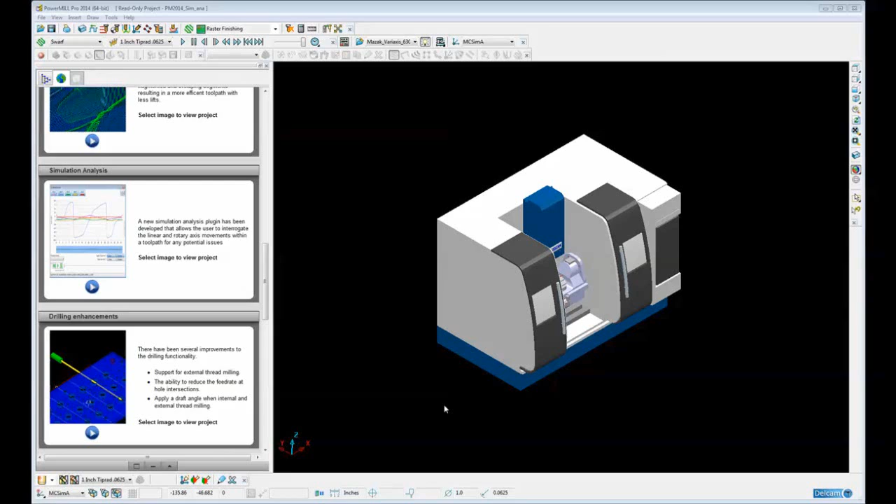A new plugin has been developed that allows us to analyze the machine tool simulation so that we can interrogate the linear and rotary axis movements within a toolpath for any potential issues such as axis reversals, for example.

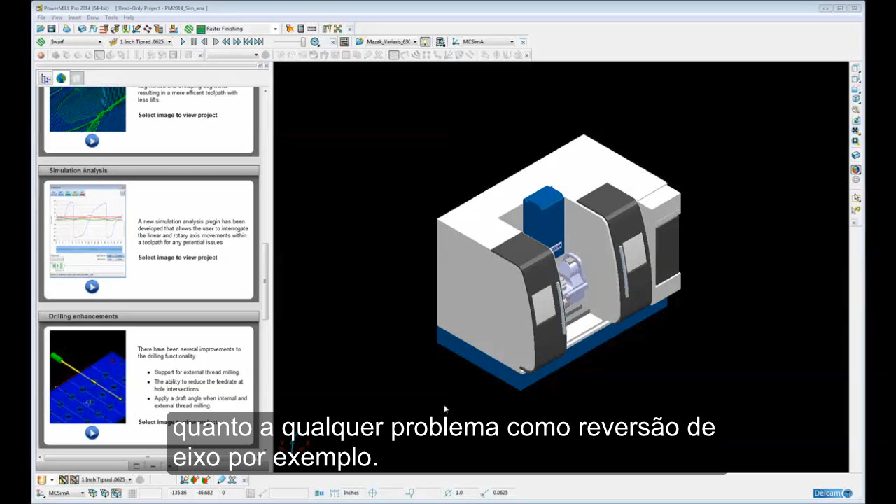If we view our plugin window, here we can see the simulation analysis plugin at the top, and we'll just go through an example of how to use the plugin.

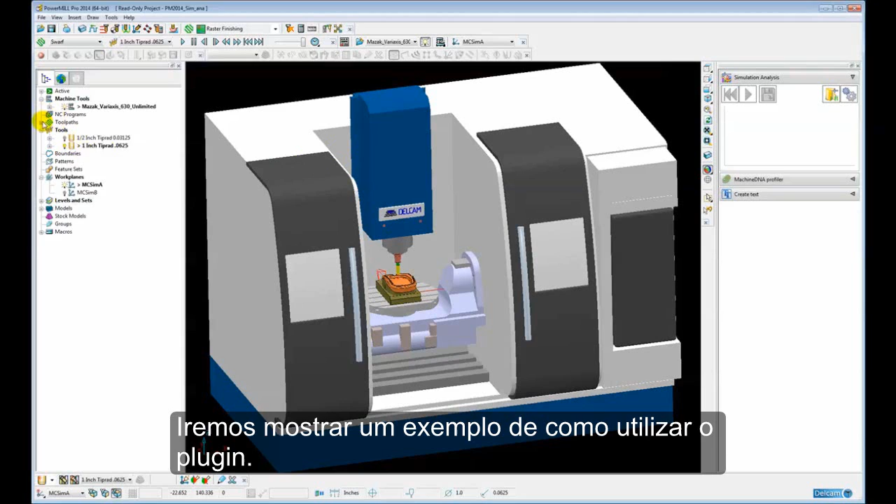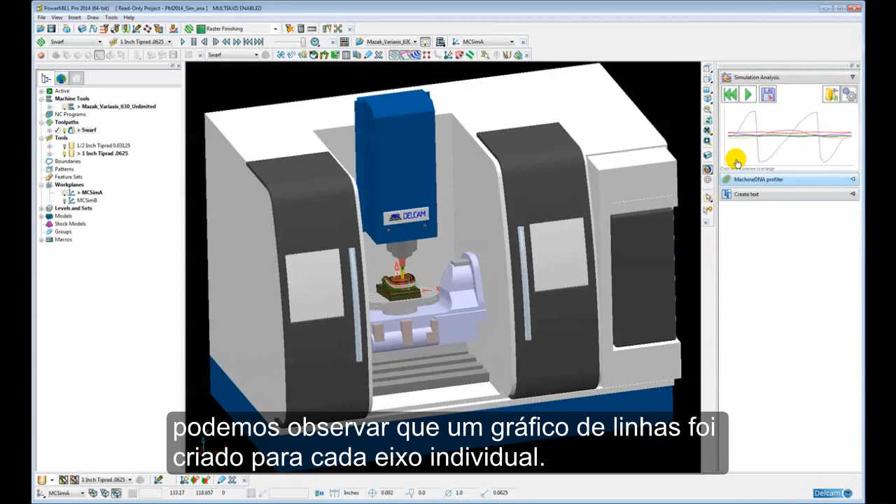So if we simulate from start, activate the toolpath, then simulate from start again and save the simulation, you can see a line graph is produced for each individual axis. If we click on the small view here, it brings up a much larger window.

Each individual axis is drawn in a separate colour, and we can plot the axis angle against the time or against the number of points in the toolpath.

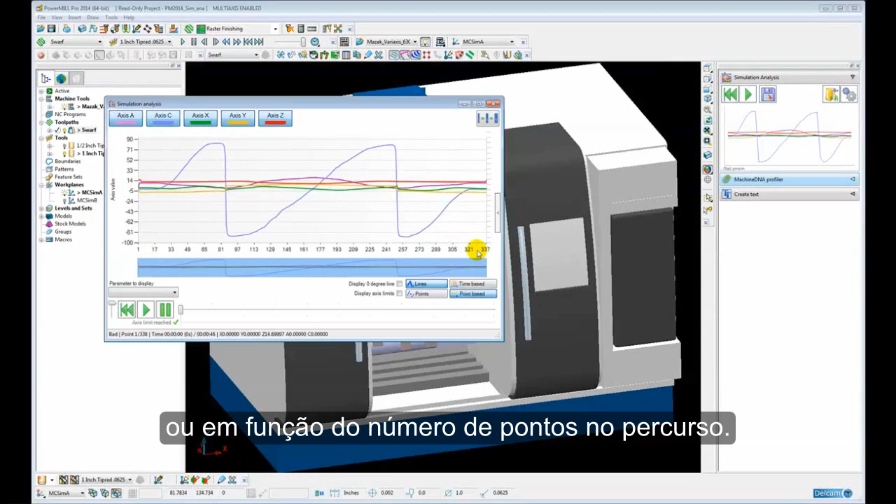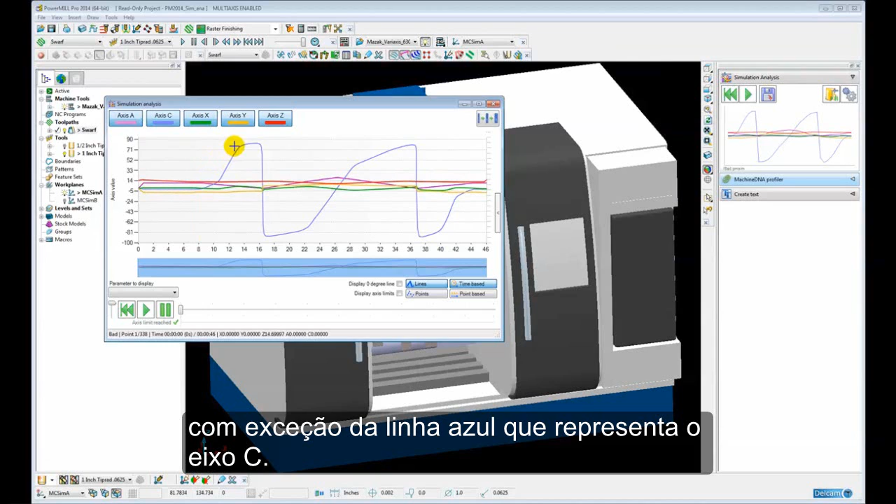If we look at time based, we can see here that most of the axes are well behaved, with the exception of the blue line here, which is the C axis. The C axis is the rotary table on the machine.

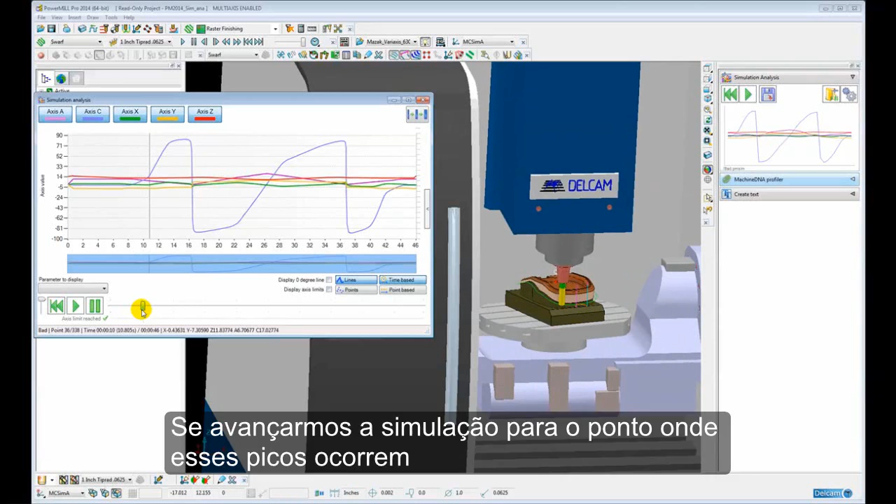So if we just fast forward the simulation to the point where we get these large dips and large peaks in the C axis, you can see the C axis is rotating positively.

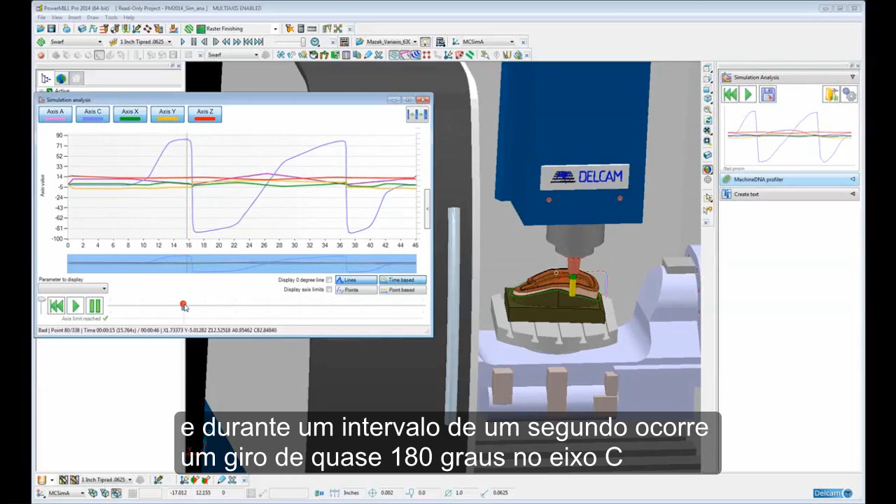And then all of a sudden it reaches this peak of around about 82 degrees, and over the time period of what is literally 1 second, we have a full almost 180 degree swing of the C axis from positive 82 degrees to negative 87 degrees.

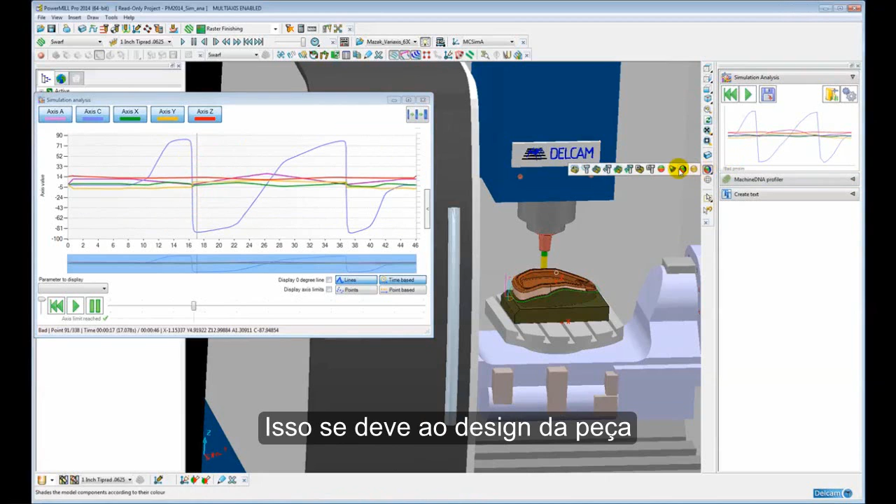This all occurs over a very small distance, over a very small period in time. The reason for this is because of the design of the part, where the draft surface on the side of the part goes from positive to negative.

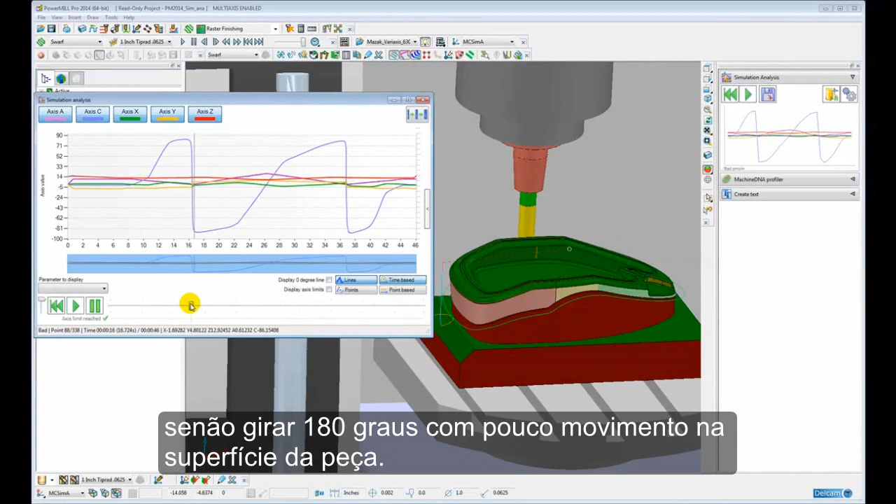And because of this positive to negative shift in the draft, the machine tool has no choice but to swing through 180 degrees with very little movement across the surface of the part.

So this is going to lead to potentially a very bad surface finish in this part, because we have a very rapid movement of the C-axis but a very small movement along the part surface. This is obviously easily identifiable using this new simulation analysis graph.

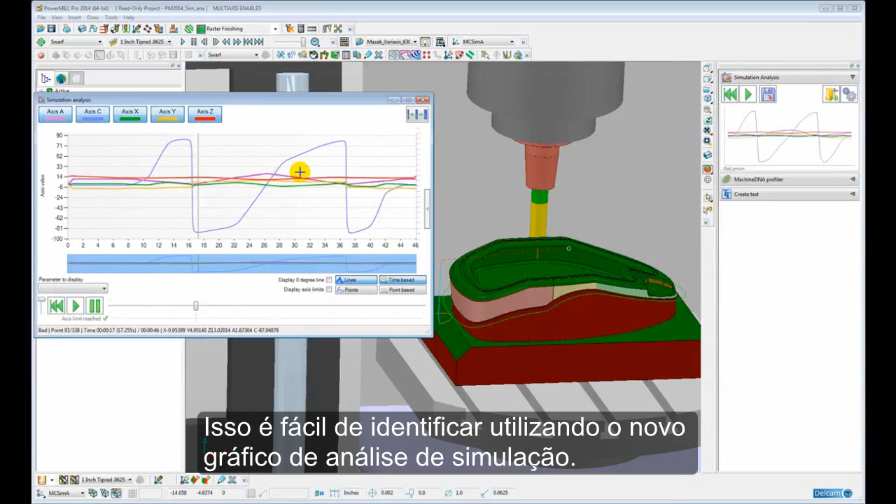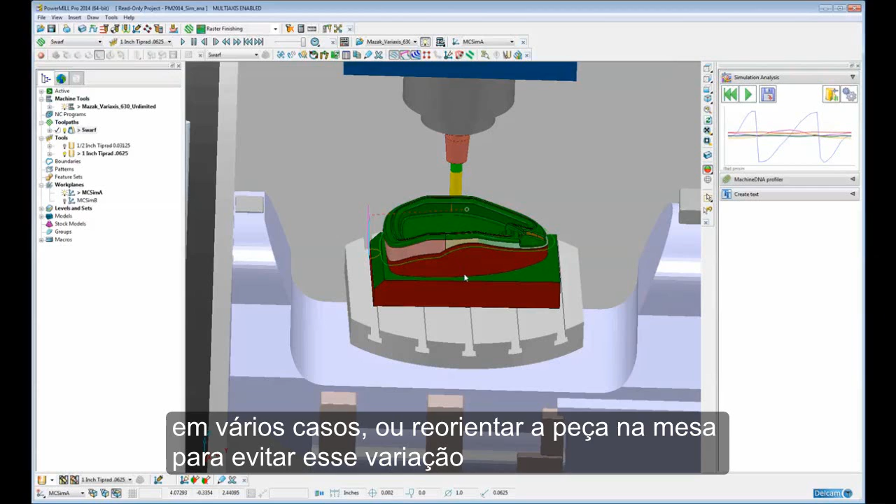So let's have a go at getting rid of this sudden swing in the C-axis. Now the only way to achieve that would be either to remodel the part, which obviously is not possible in a lot of cases, or to reorientate the part on the table so it doesn't go from this positive to negative draft angle.

And the way we can do that is by simply using a different datum orientation and positioning the part on an angled vise, like so.

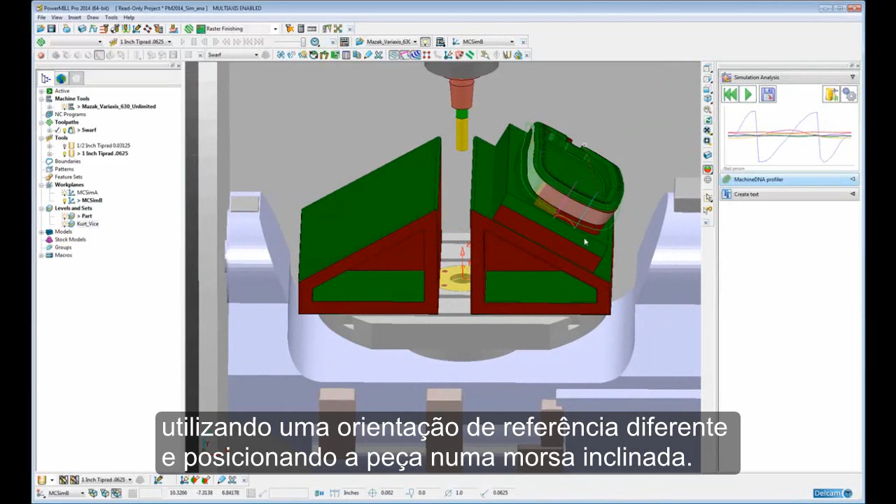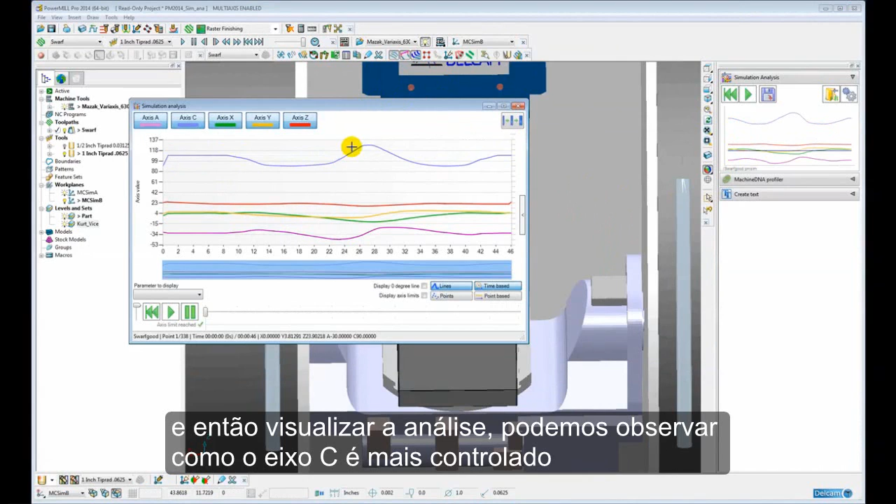So now if we rewind the simulation and replay it, then save the simulation again, and then view the analysis, we can see now that the C axis is far more controlled and has none of the peaks and troughs that we had in the previous toolpath.

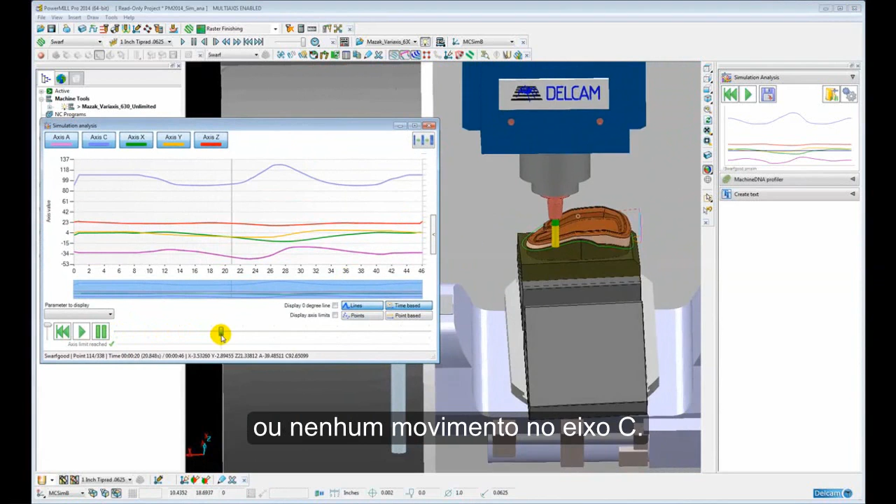So if we now just play the simulation forward again, we can see at the point where we had the sudden swing in the C-axis, it is now nice and controlled and there's very little or no movement in the C-axis. The only time the C-axis now rotates a large amount is when the tool has to swing around the front, but again it's in a controlled manner.

And back to the beginning.

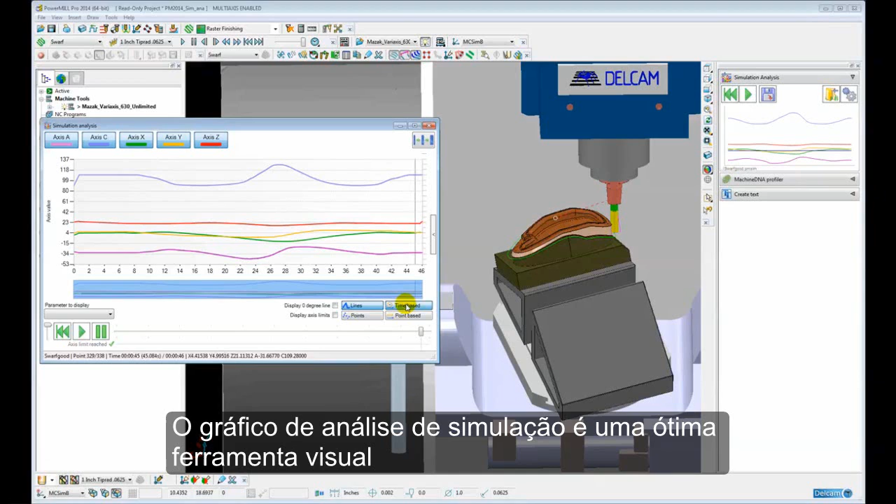So the simulation analysis graph is a great visual tool for easily identifying any potential problems with our toolpath in terms of possible surface finish issues or axis reversals.